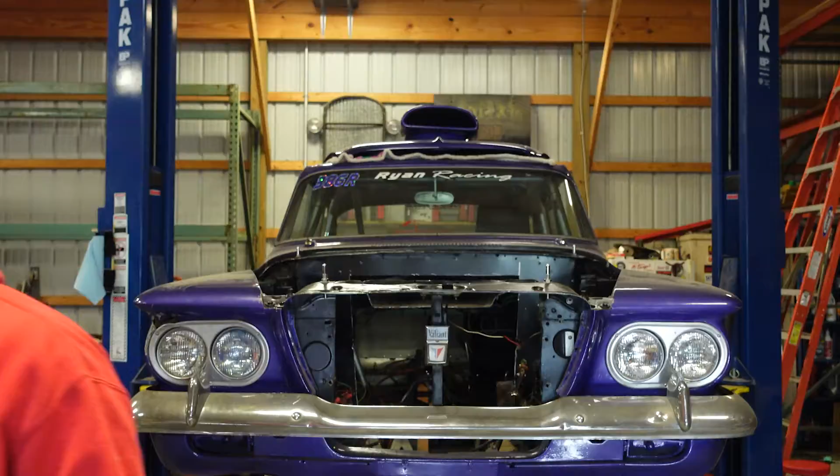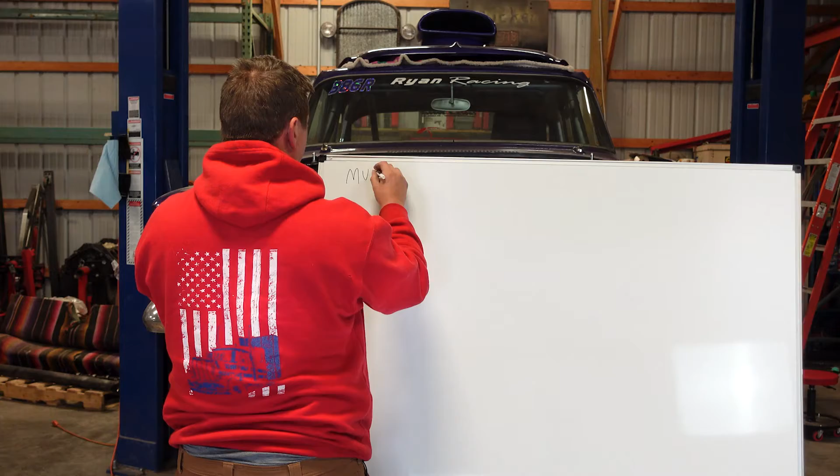I need to figure out a way to be able to talk. Tell you what, I'll be right back. I think this will do. Be right back. Perfect. That'll work. Also got markers. You guys can't see that at all, can you? Be right back. I think I got everything this time.

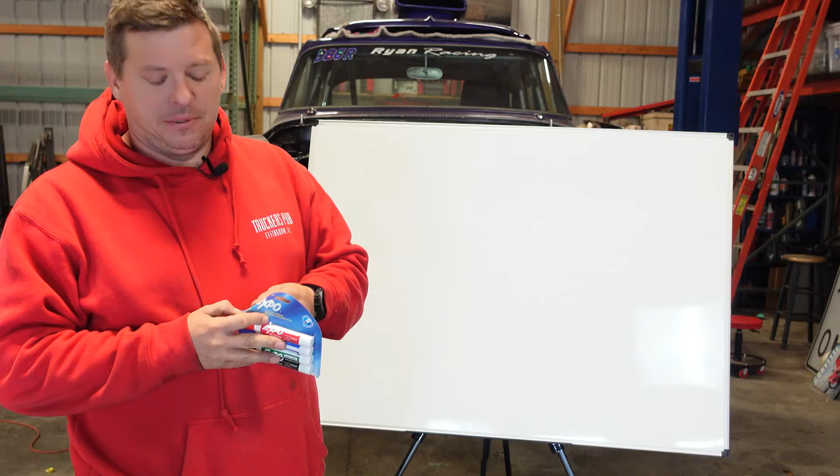All right, let's get started. All right, 6 things that you need to address before you make any cuts when you're upgrading a front suspension.

I don't care if you're changing the style or not, these six things need to be taken into consideration before you start the project because they're gonna dictate how the project goes. The first 3 are super important before you cut anything because you won't know where they were before if you don't measure them prior.

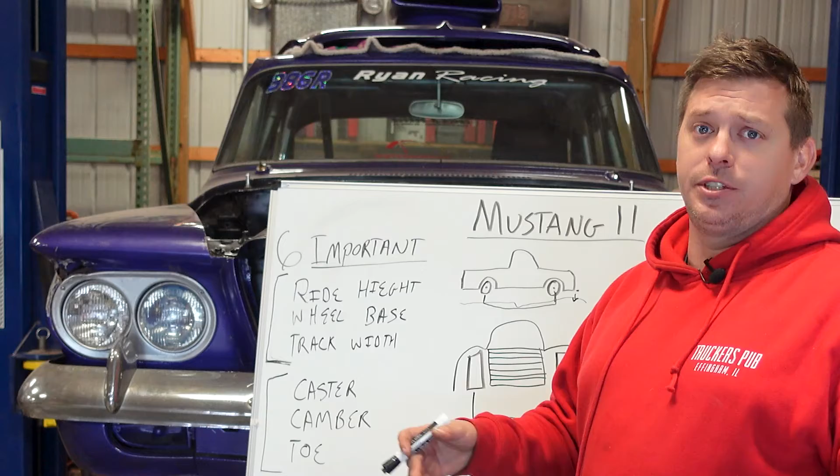You could guess all day, but the best thing to do is before you make a cut, go ahead and get at least these 3 done. The next 3 is something that you can take into consideration as the project progresses, but these 3 are super important. The first one's gonna be your ride height.

And I take that from your frame rail to the ground. So imagine my crude drawings here, this is my truck over there. I would measure from the bottom frame rail to the ground, okay? And let's say that measurement is 6 inches.

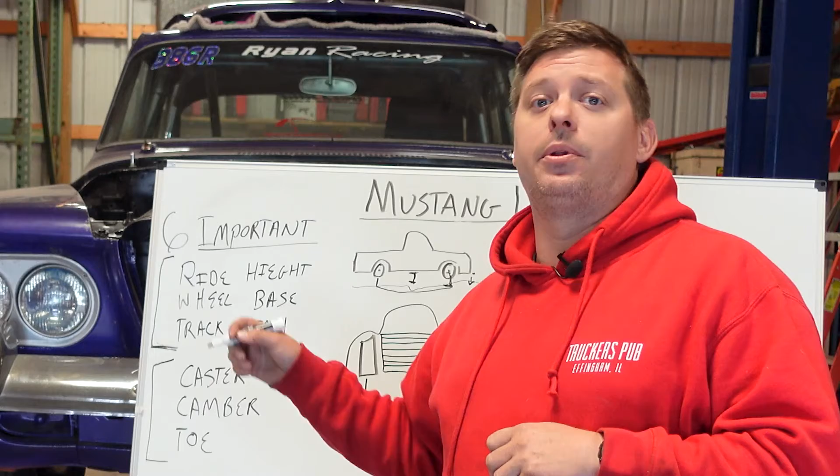I'm sure it's a lot less than that, I think mine's 3 inches, but let's say it's 6 inches for safety's sake. Then you also need to take a measurement from the center of the wheel to the ground as well, and you need to write that down. That's generally gonna be the size tire divided by 2, but you need to make a note of that so that you know, because when you start setting your spindle height, you'll know that off your chassis height, all right?

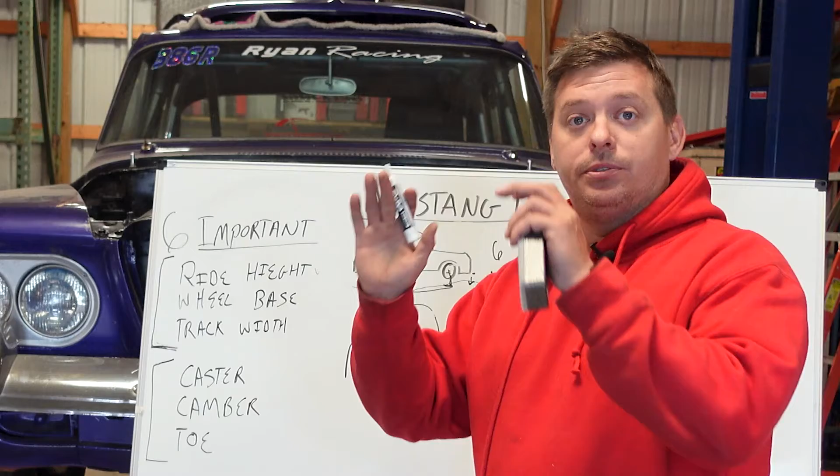The next thing you need to know is your wheelbase. Wheelbase is measured from the center line of your rear axle to the center line of your front spindle. So that's gonna be that measurement. The truck, I believe, is 119 or something inches. That's gonna be super important to make sure that you get the wheel centered in the wheel arch, okay?

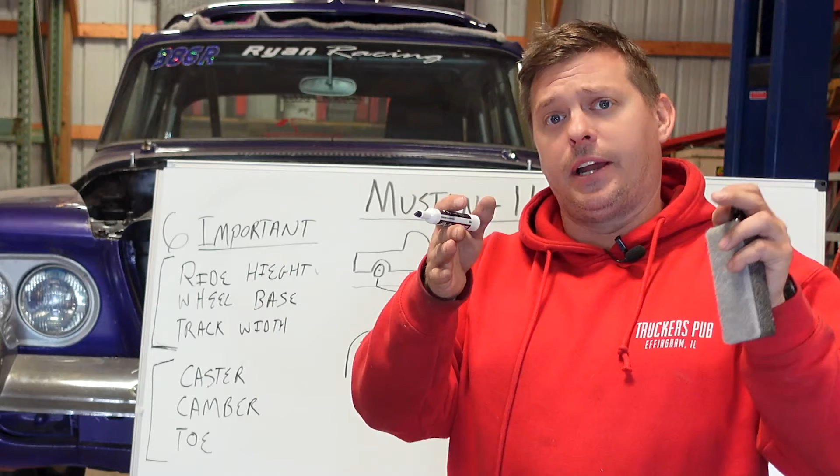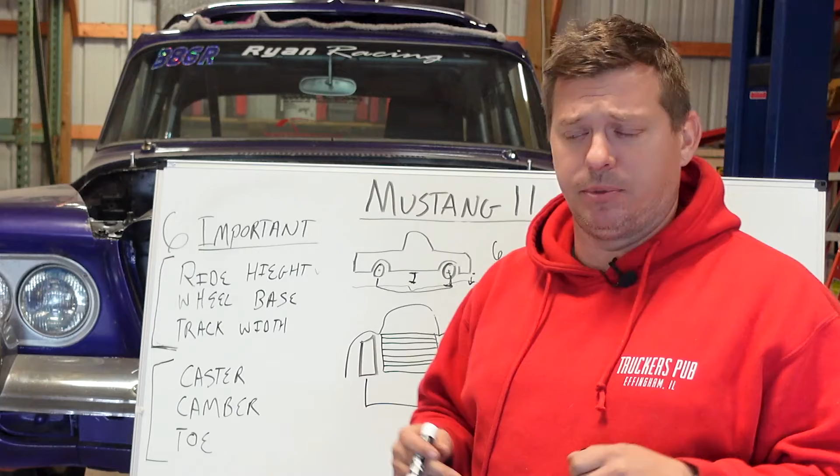Or at least how it was when it came into the shop. Unless you plan on doing something weird for drag racing, sometimes we stagger the front end, then you need to take that into consideration in the future. But still, let's just say simple basics, you need to measure the original, because a lot of the setback rules, it has to be within 2 inches or something. So take that into consideration, make sure you measure it now.

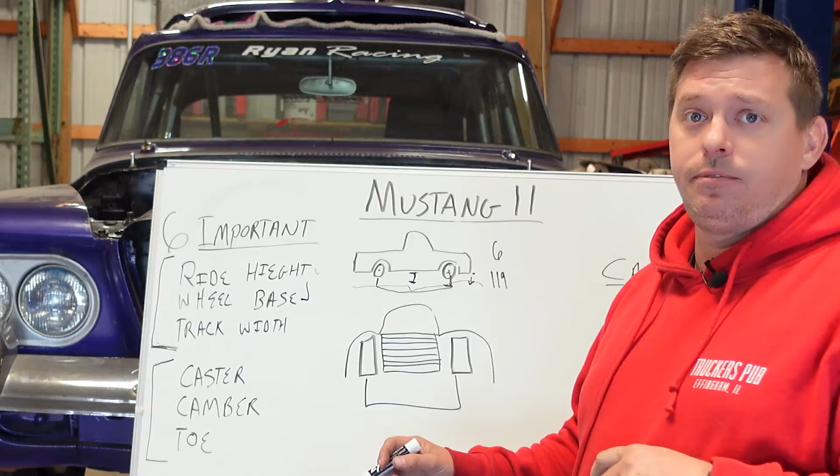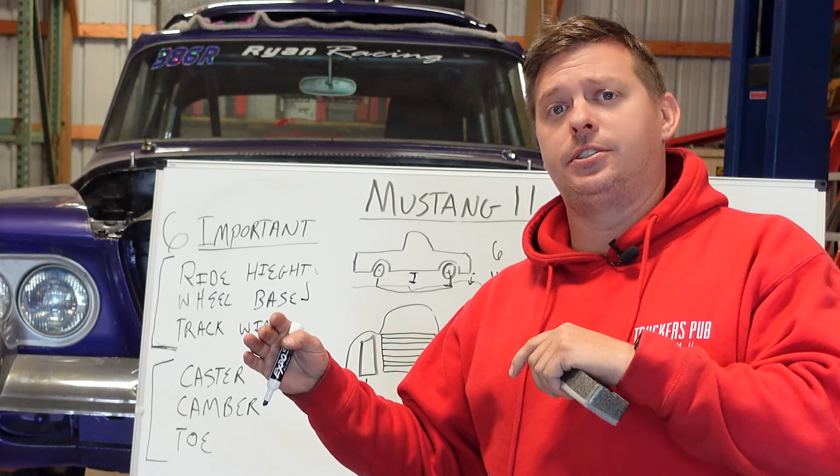The last thing that is very, very important is your track width. I measure that with the tires off, to the outside edge of the rotors. That'll give me where the tire mounts. The reason I do that is if we were taking consideration for a different wheel type with a different offset, we can do the measurements from that to get your track width.

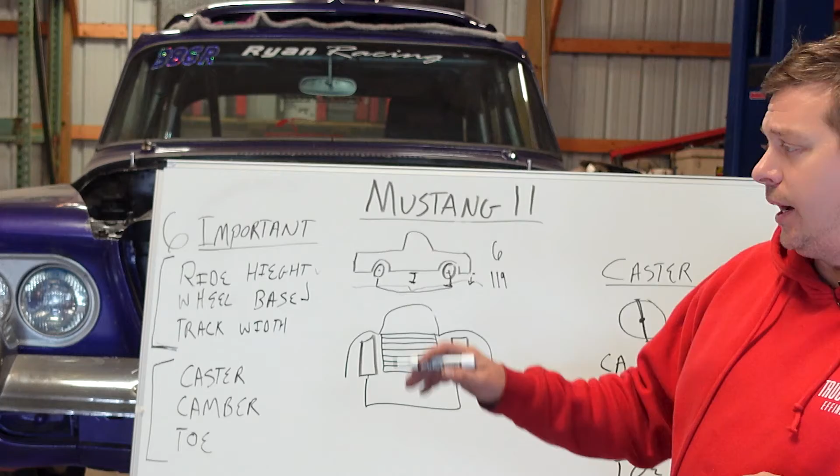So imagine this is the front of the truck, that's the grille, that's transparent tires in the front. You're measuring from rotor face to rotor face, from the outside edge to outside edge. I do not know the measurement on my truck, but I did narrow it. The front end, I did narrow it by a couple inches to get the tires to set up in the fender and still get turning radius.

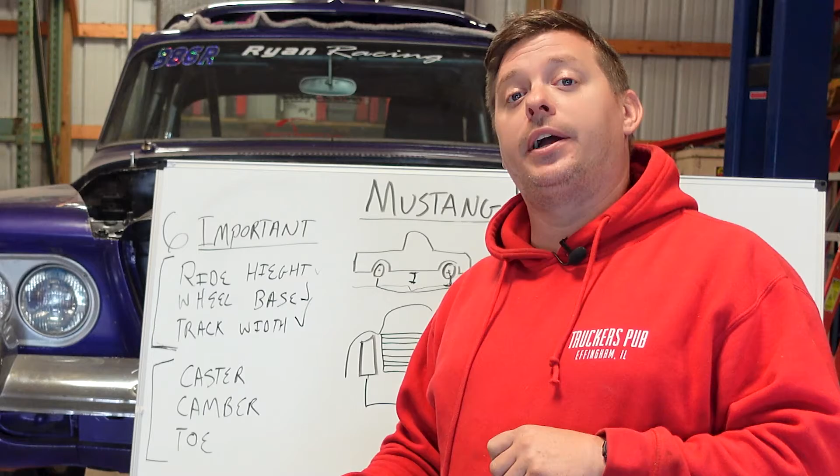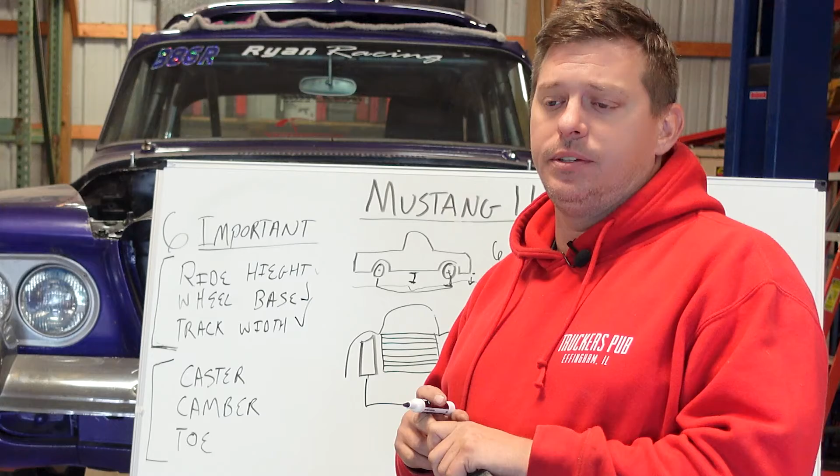So those 3 things are what's really important before you do any cutting. The next 3 things you just need to think about. You could take measurements off the original if you're trying to go back to an original style. Most of the time, these guys watching this are going to be upgrading to probably a Mustang II, or maybe even Dodge Dakota has a front end. It's very similar, it has more adjustability.

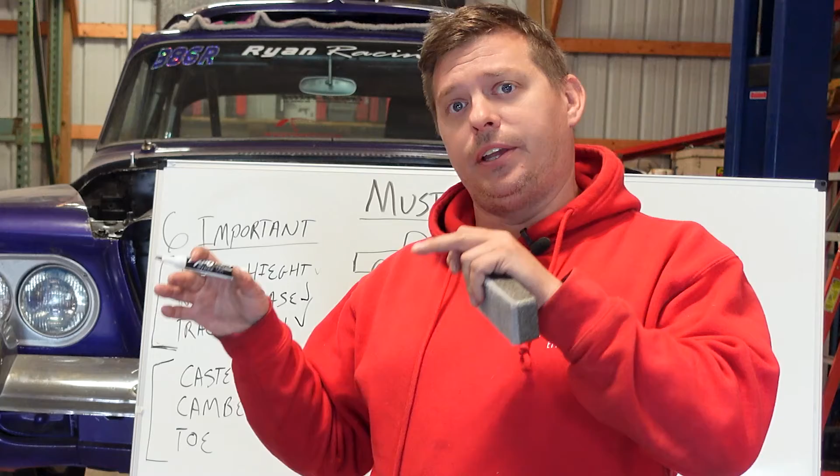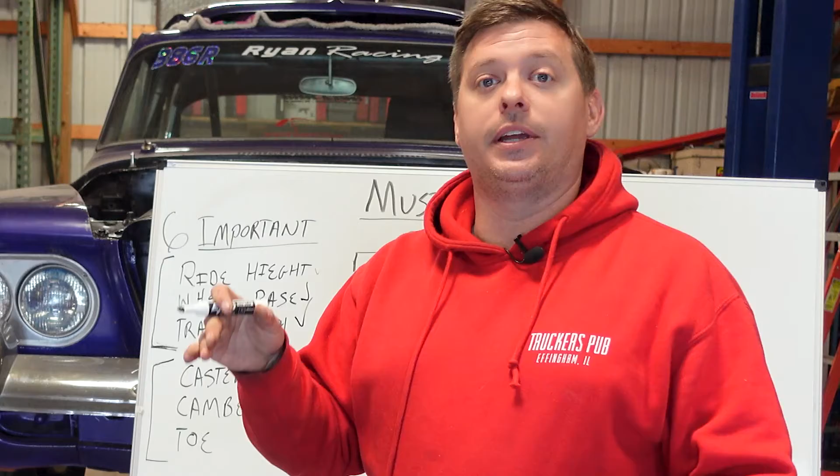But you need to consider these 3 things, because as you make these parts that you're gonna have to mount to the chassis, you need to make sure that whatever you decide on caster, camber, and toe, you need to be able to work that into your project and not run out of adjustment, because all these things need to be adjustable to get alignment, to be able to go straight down the track or around. So these are the 3 things I have to think about.

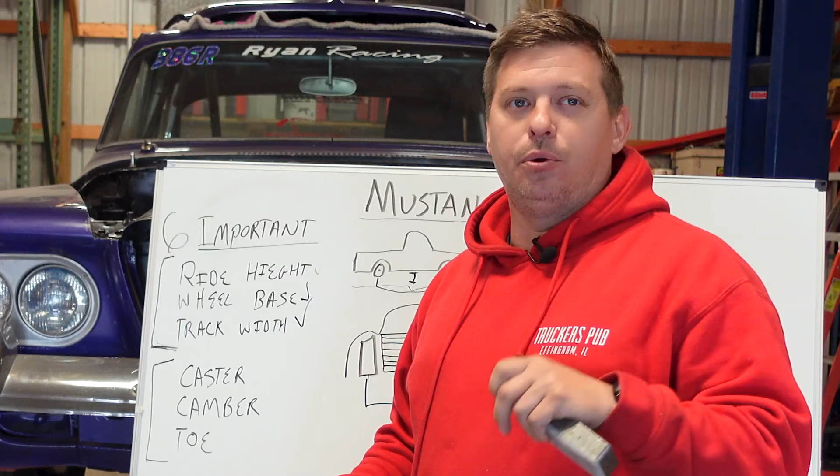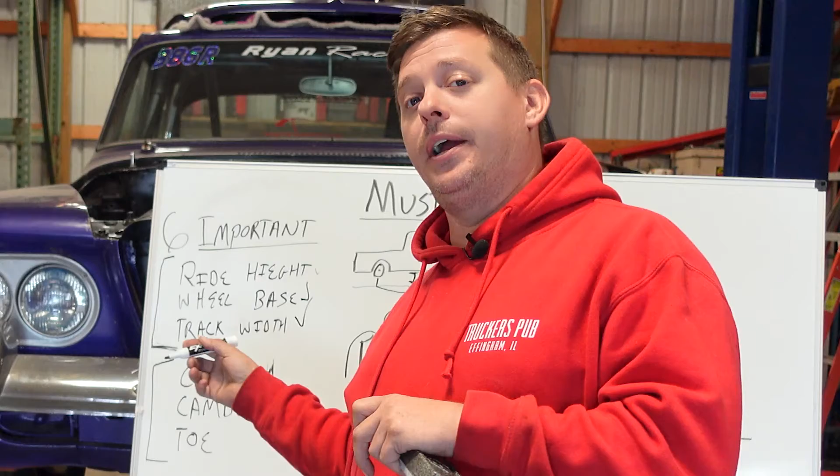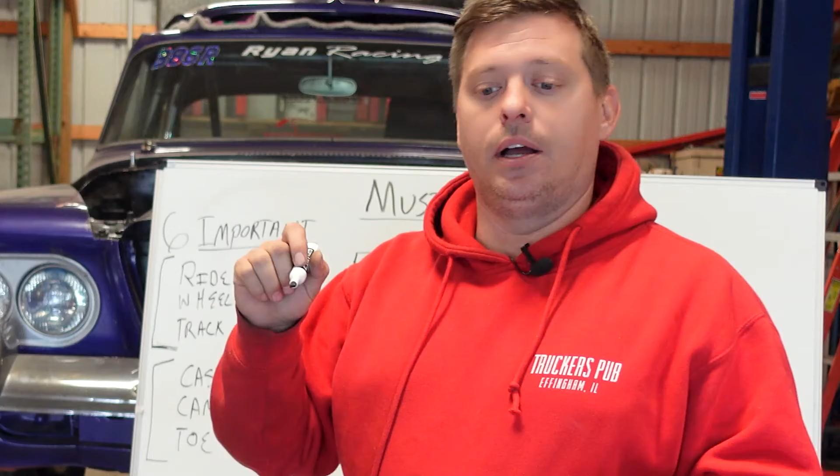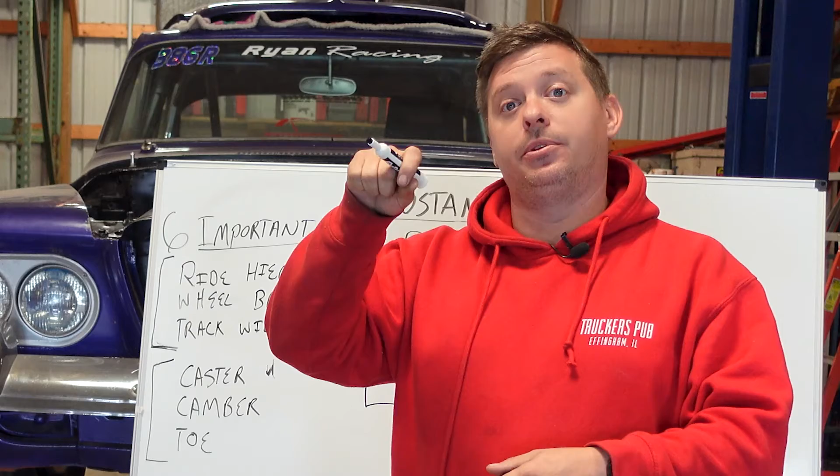On the caster, if you're going to go on the road, or maybe a roundy round or figure 8 car, you're looking for about 4 degrees of caster, and that's using positive caster, so it's gonna be leaned back. I'll show that over here. On a drag car, you can get away with like 6 to 8 degrees. That's gonna keep the car wanting to go straight. And since drag racers wanna go straight, it's good to make it a little more wanting to keep the wheel centered. The one trade-off to that though, is the higher the degrees of your caster, the harder it's gonna be to turn, either at speed or going slow, because it's gonna want to whip back. So take that into consideration.

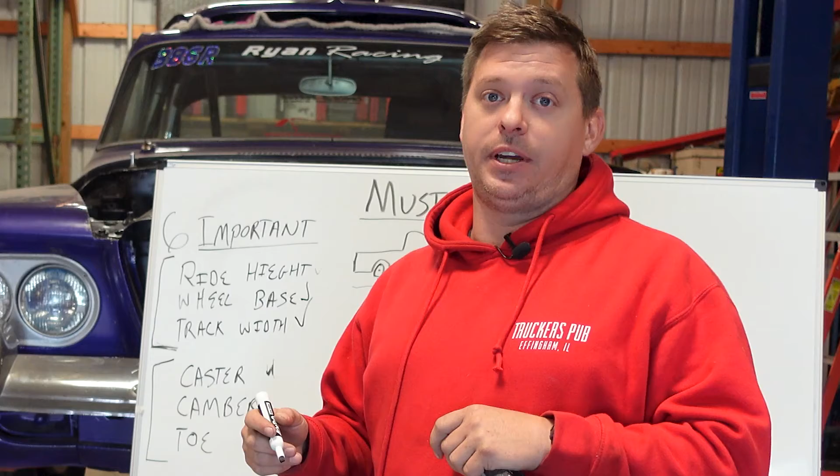What you don't wanna do is have 0 degrees caster. It would be extremely unhandleable. It would try to wander all over the road. So you need at least 2 to 4 degrees minimum of caster. I'll explain what caster is over here.

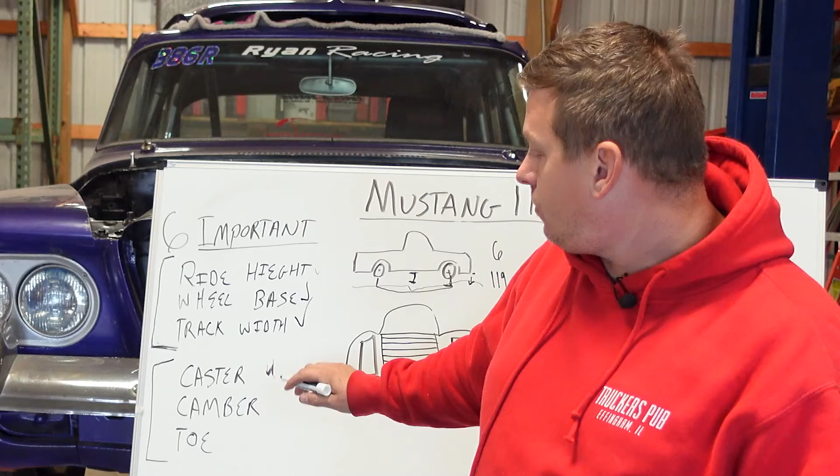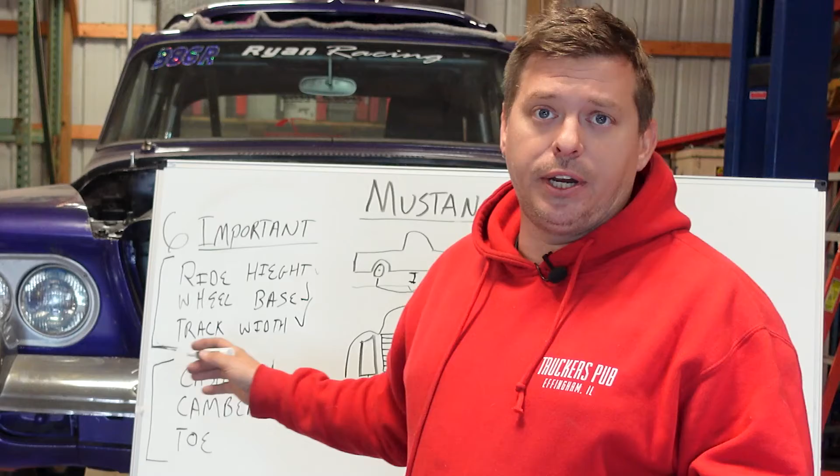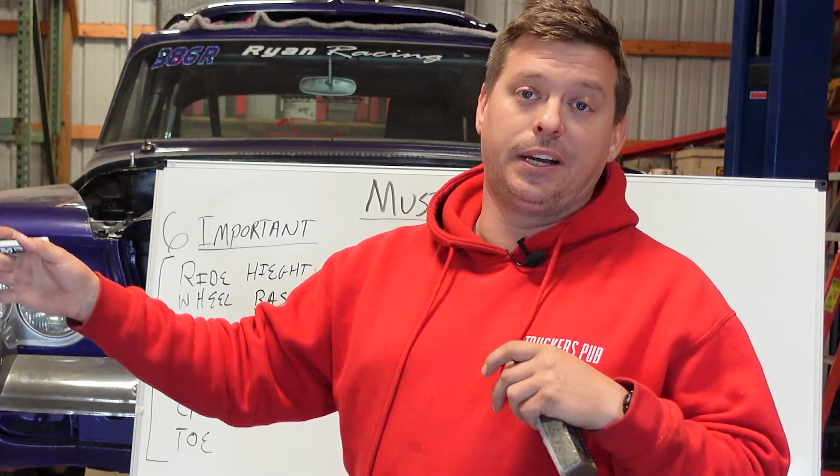Camber is, if you look at cars that have been lowered a lot, you'll see the front tires kind of bend in like this, or like that, depending on how the suspension's made. That is your camber. I'll explain that over here as well. On drag cars, it's 0 degrees - you want straight up and down. Roundy round cars sometimes will have some positive or negative camber depending on what direction they're turning on one side. So again, you need to make that application specific.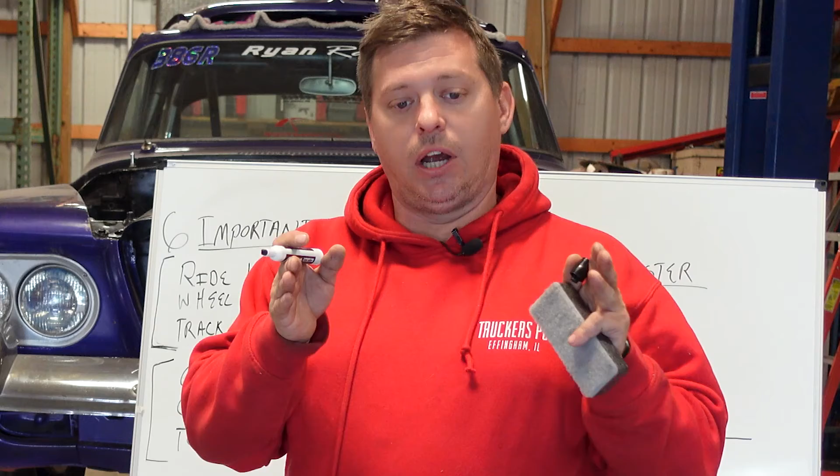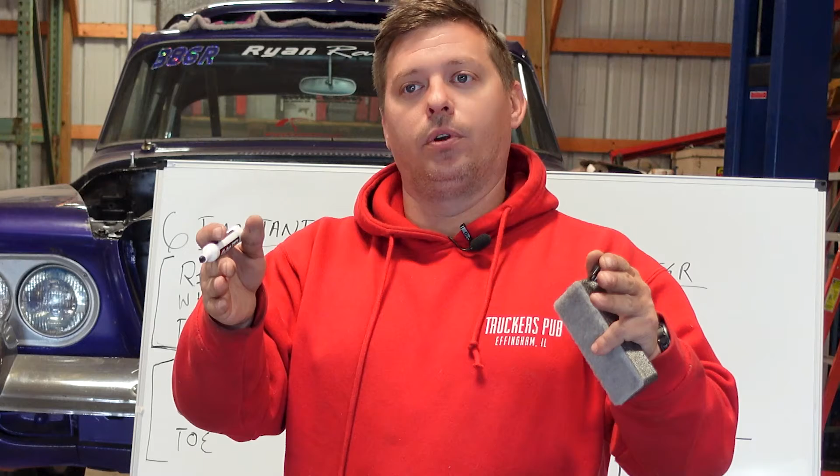The last thing is toe. That's the front wheels - I'll explain it over here - driving forward, most cars and most applications that I know of, you want a little bit of toe in, about 3/16 of an inch toe in. As you're going down the track or at speed, the tires are going to want to pull out, and then you're going completely straight at 0. So 3/16 is kind of a general rule of thumb.

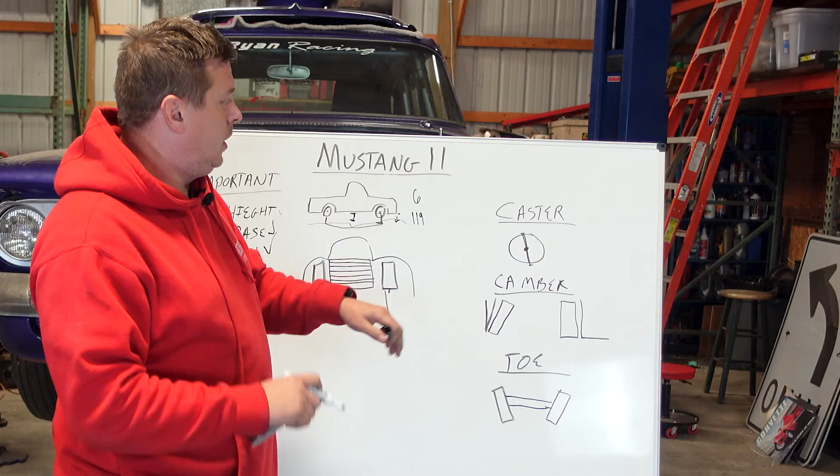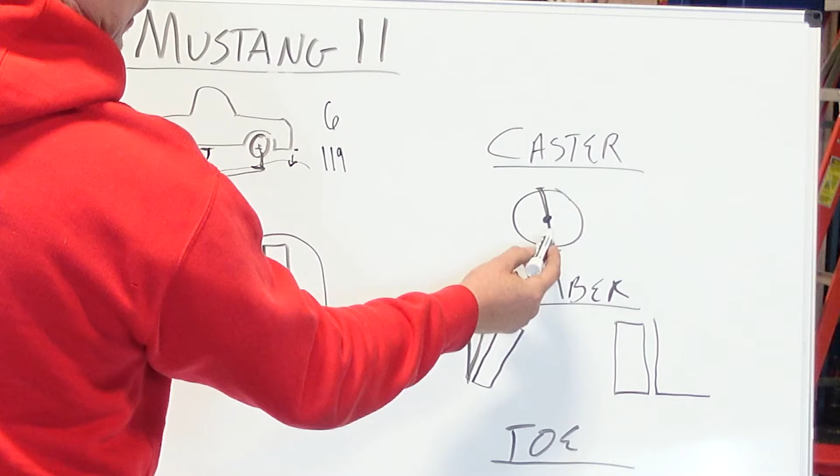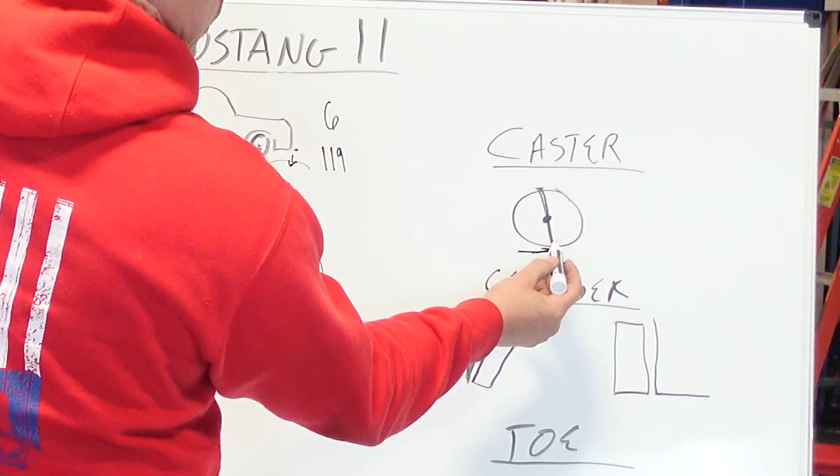So let's go over here and talk about what each one of those are real quick. The first is caster. This is going to be really hard to imagine, and I'll probably have to put a picture up so you can see it. But imagine that this is your tire, and this line right here is the actual axis the tire sits on, or your spindle sits on. I use positive degrees of caster - positive degree is when it's leaned back. This angle right here from 90 is your caster. How far the spindle is leaning backwards will dictate the handling, kind of like a shopping cart wheel.

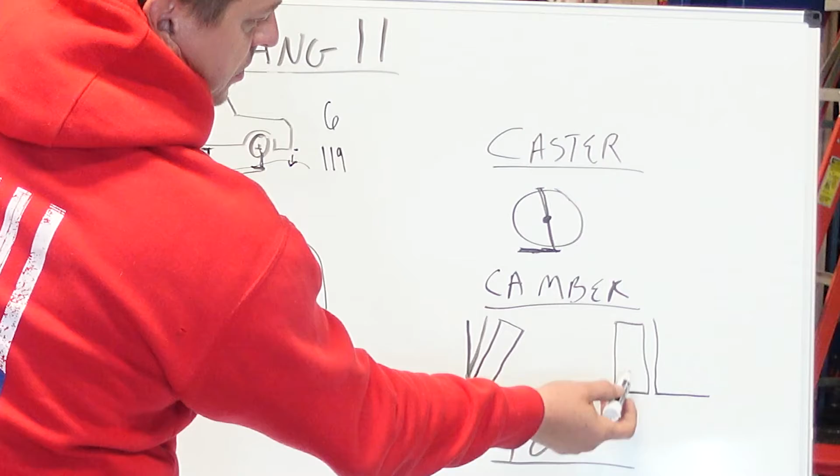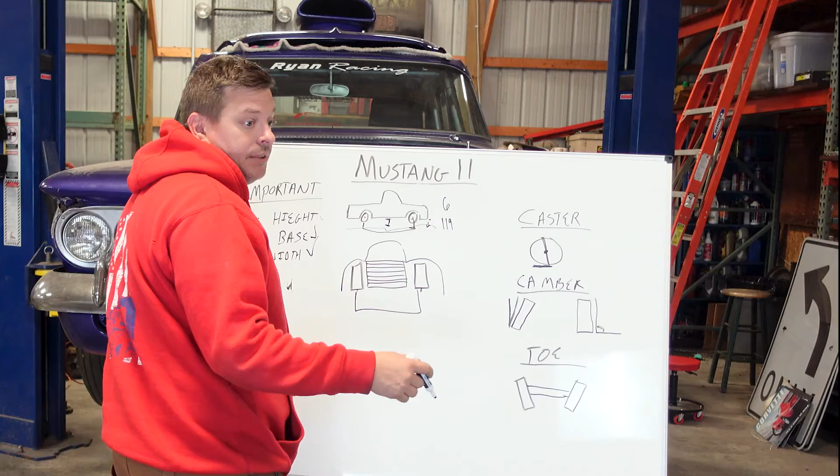The next one is camber, and again, imagine these being wheels. This is cambered negatively, so the tire is inboard, and this one's a 0-degree camber - so that's 90 degrees, the tire's straight up and down. As a drag racer, this is what we're looking for. As a roundy round car, you may have that much camber - you may have 10 degrees, 20 degrees of camber, to be able to get around the corner faster.

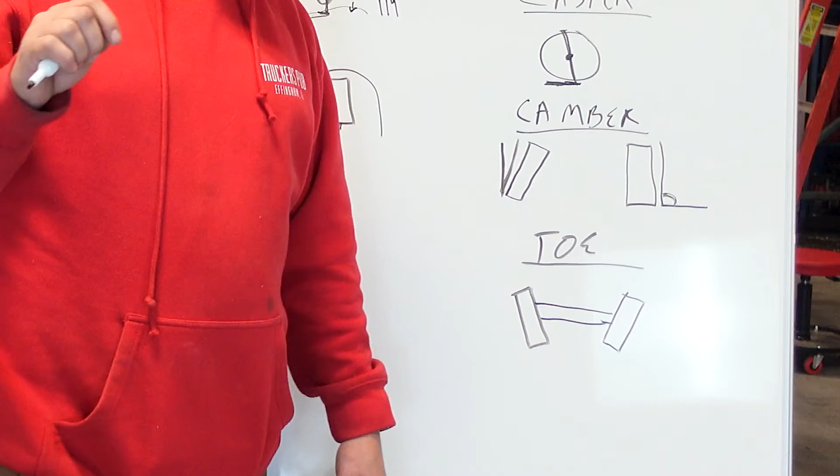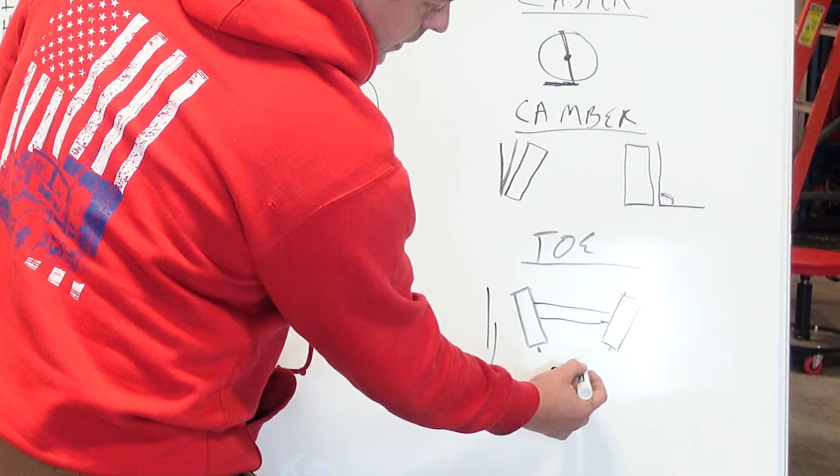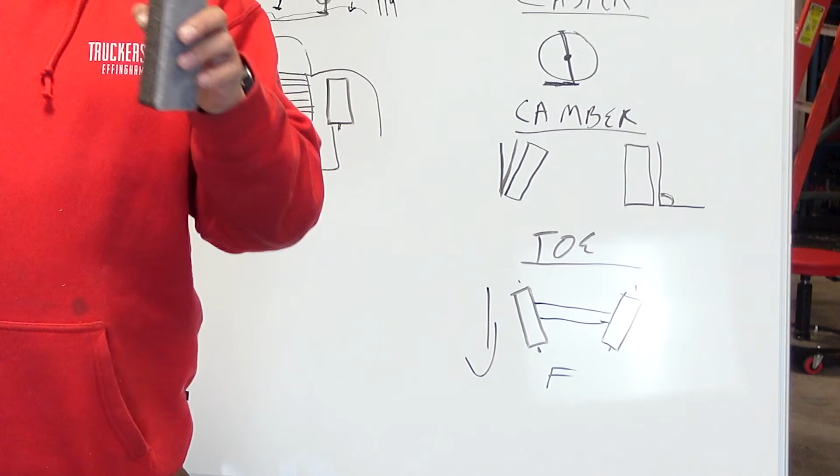The last thing is toe, and that's set up with the actual steering device, whether it's a rack and pinion or a drag link or anything like that - that's how you're going to set your toe. This is very exaggerated toe, but this is the front going this way, and we want toe in. So the measurement from the center of the tire to the center of the tire, we want it to be roughly 3/16 inch. You measure the front, measure the back, and that's gonna give you your toe. Again, you want a little bit of toe in to keep it going straight when it pulls out. So these are the things that you have to decide on or think about, or at least mark down before we get started.

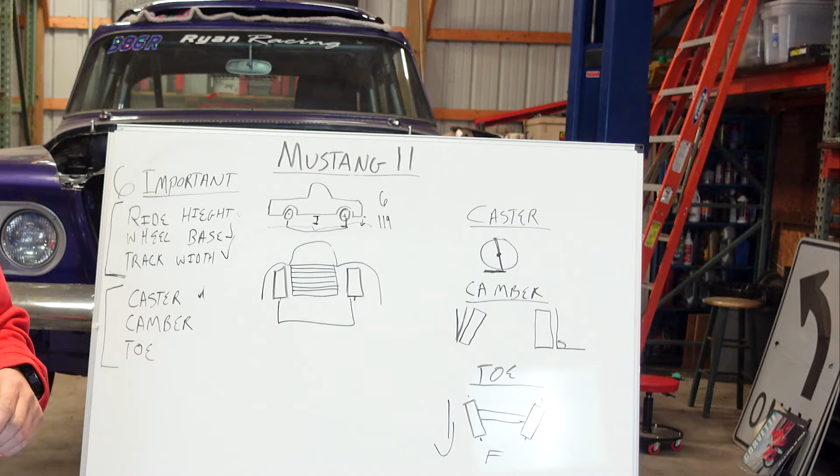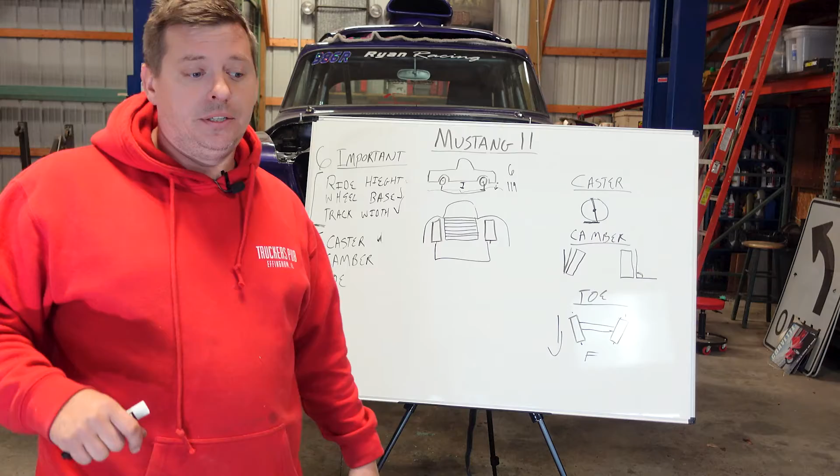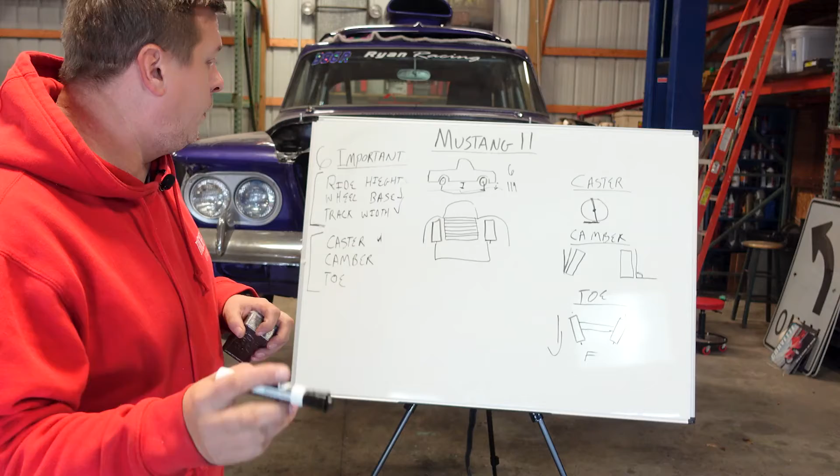So we're gonna actually start looking at these three here. Before I can do that, I'm gonna have to take the front coilovers off so that I can get it down to ride height. There's no motor in this, so I'm gonna have to guess where the ride height was. One thing with the suspension - the Mustang II suspension - you have an upper and lower control arm. So that's a ball joint. There's your spindle.

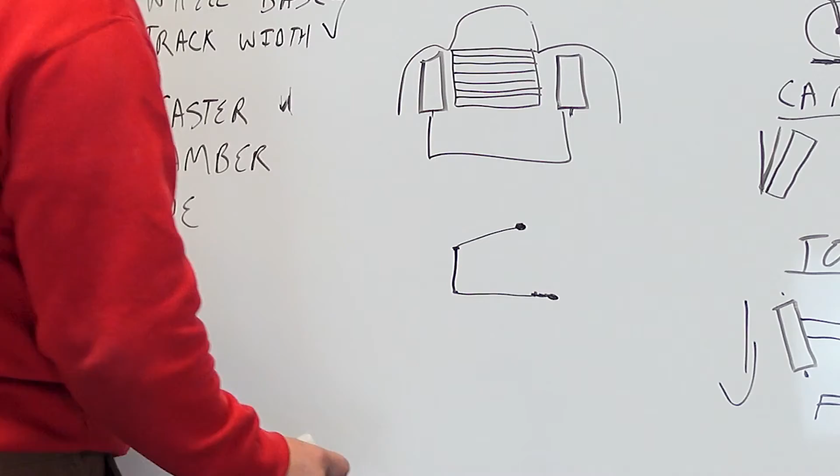All right, actually this is the wrong way. Let's do it the right way so we don't screw this up for you guys.

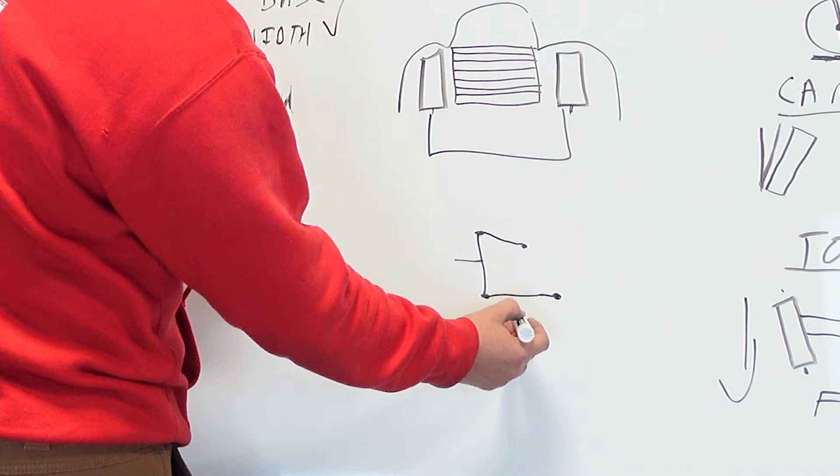Imagine this is your spindle and ball joint. Your upper control arm mount is going down approximately 20 to 30 degrees, and you want your lower control arm to be parallel with the ground, so you want this at 0 degrees. That's how I set them up, and I've had good success with this.

The reason you want this one to be downward is as you make a turn and the suspension gets loaded on one side, it's actually going to cause the tire to camber in, which gives you more traction on the ground. Also, almost all Mustang 2s are not parallel, or not equal length, so your top's always gonna be shorter than your bottom.

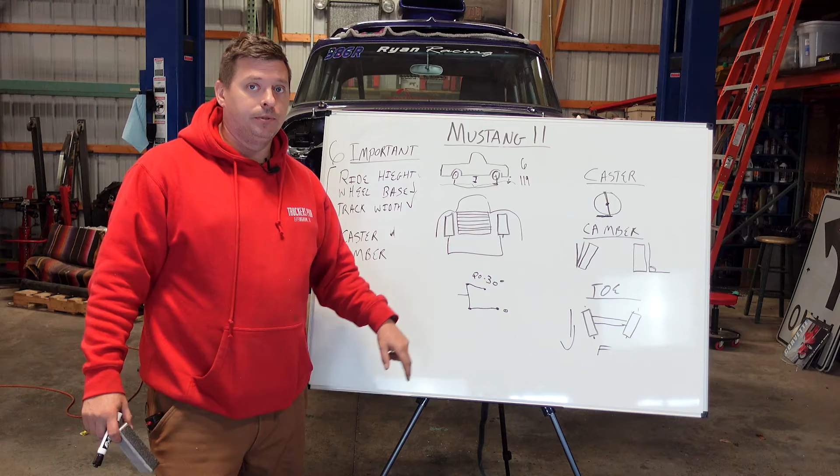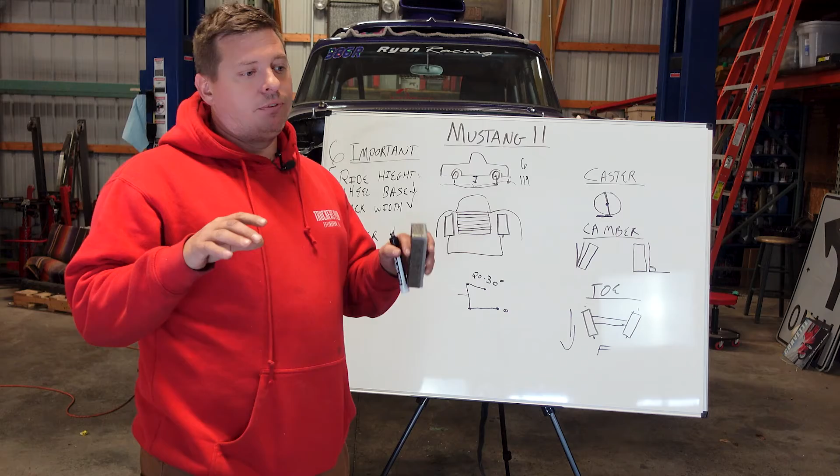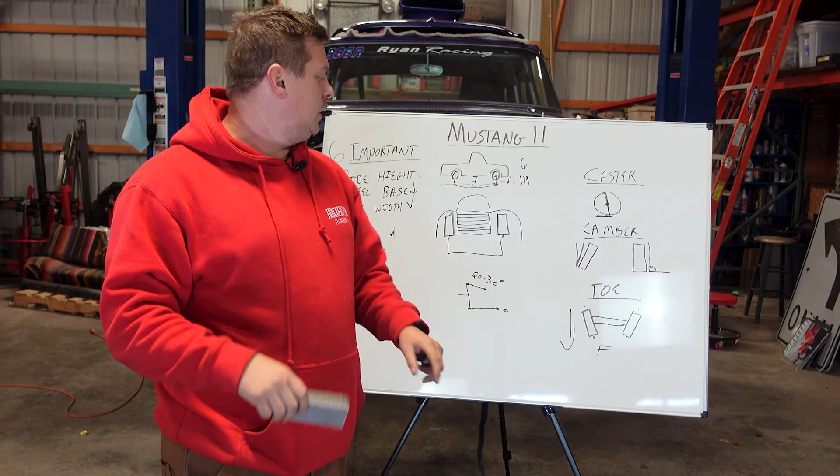Those type of things we'll get involved with more when we actually set up the suspension or get the design made. I'm half and half on whether I'm gonna do round bar and get everything mounted to the round bar, or just use the CNC plasma to cut out some Mustang 2 style suspension and tie it all together from the steering rack mount. We'll have to decide that when we get there.

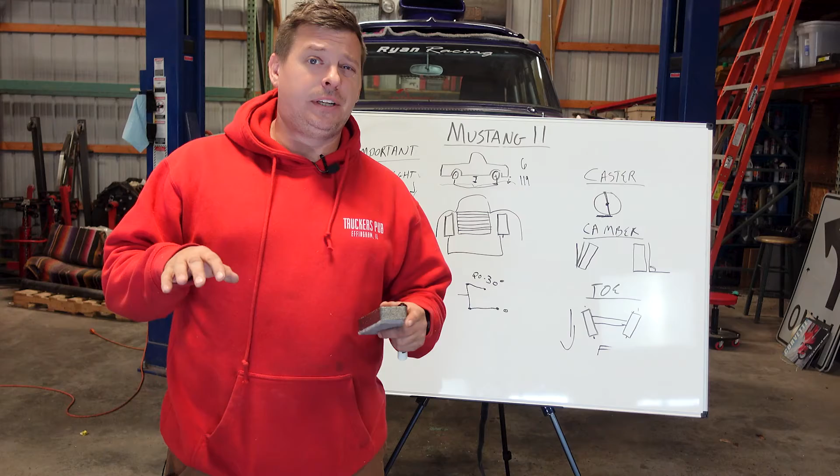I'm fairly certain I'm gonna lean towards using the plasma table. I think it's gonna give a cleaner look, and it's gonna be lighter than trying to add a bunch of tubes to make everything hold. So this is what we're looking for, and these things we're gonna measure right now and start getting things cut apart.

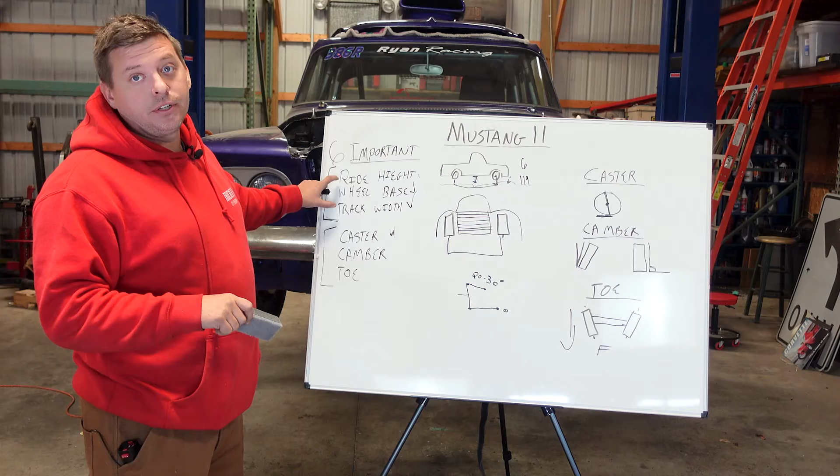All right, I just got the car lowered down, got the coilovers off so we can get it down to ride height, since there's not enough weight in the front to push it down. I confirmed it was ride height with the owner, and now I am going to show you where I took the measurements from, what I measured, and one other extra thing I measured just to check if we're gonna be improving Dalton's situation - and we definitely are. Let me show you what we got.

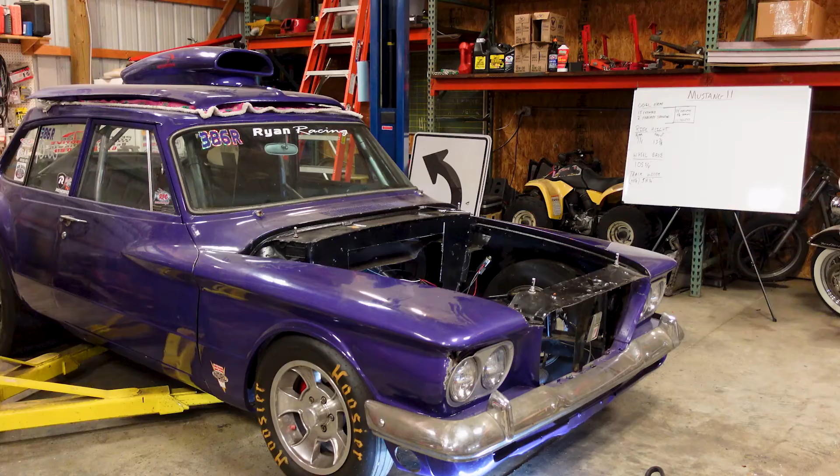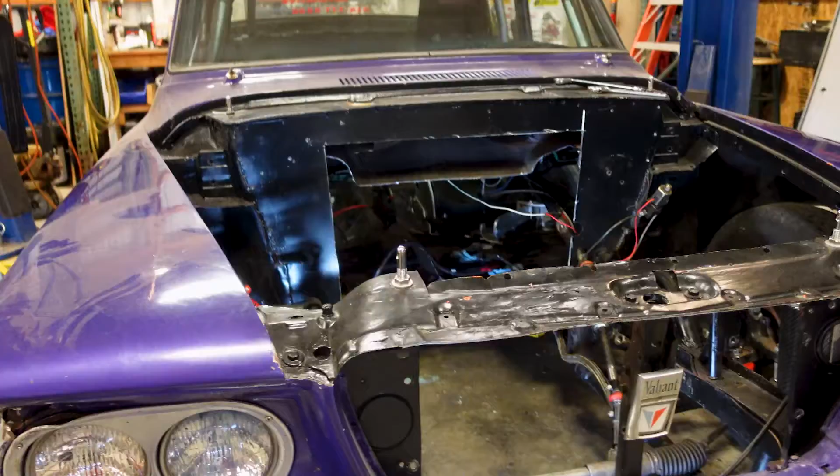All right, as you can see, we're down at ride height on the ground. We took the coilovers off, they're over there, and I'll explain what and why I did some measuring on those. But first things first, I wanted to confirm that the original install had it right.

If you can see that lower control arm right there, you see how it's roughly parallel to the ground? That's where I first lowered it to and checked the ride height, and again the owner confirmed that was the right ride height. So the guys that originally installed this did have that parallel like it was supposed to - good on them. Next, we'll talk about where I measured from.

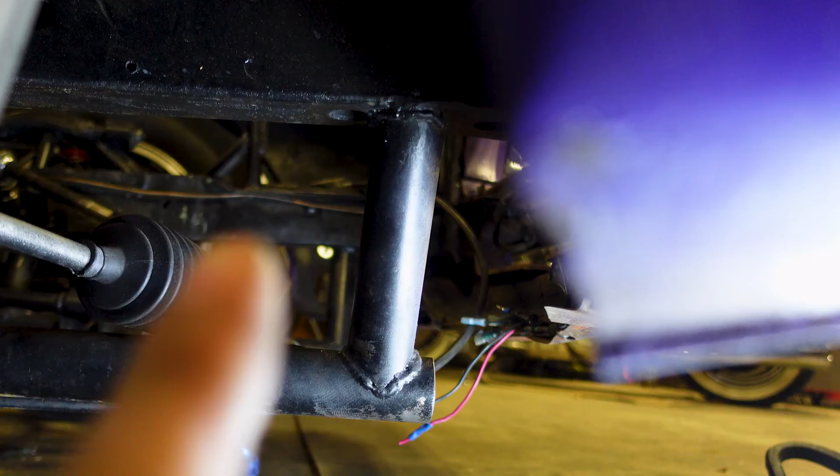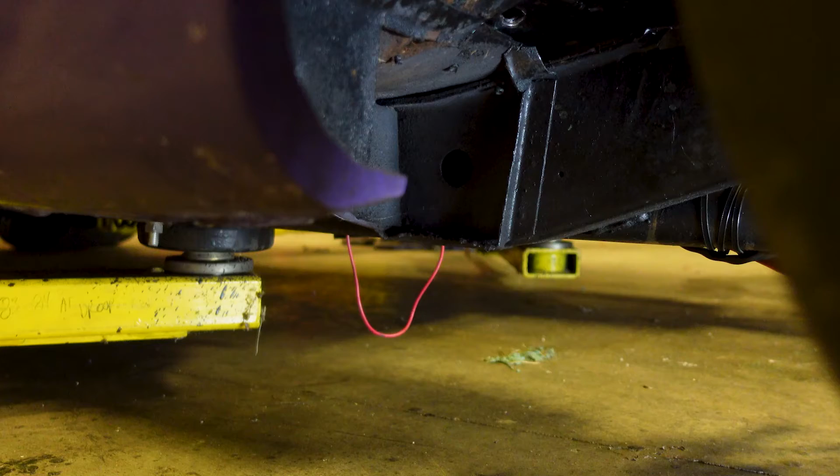See that frame rail right up there? I measured from there down to the ground. And over here, I measured from the back down to the ground. So I have two measurements, from the front of the subframe connector to the rear of the subframe connector.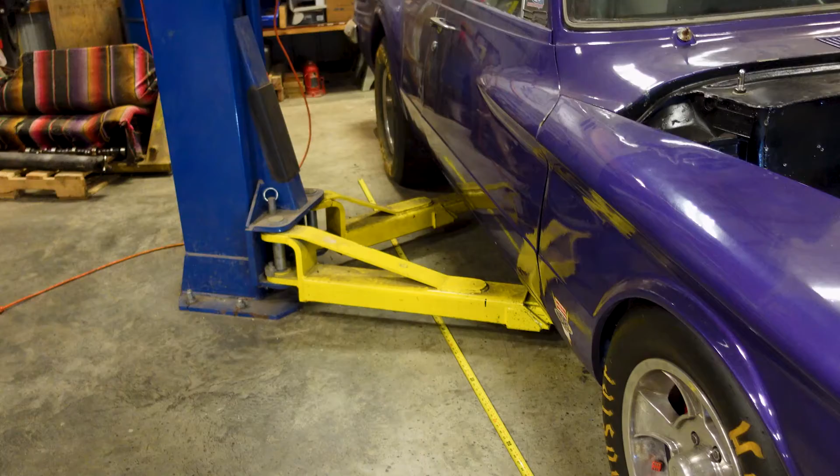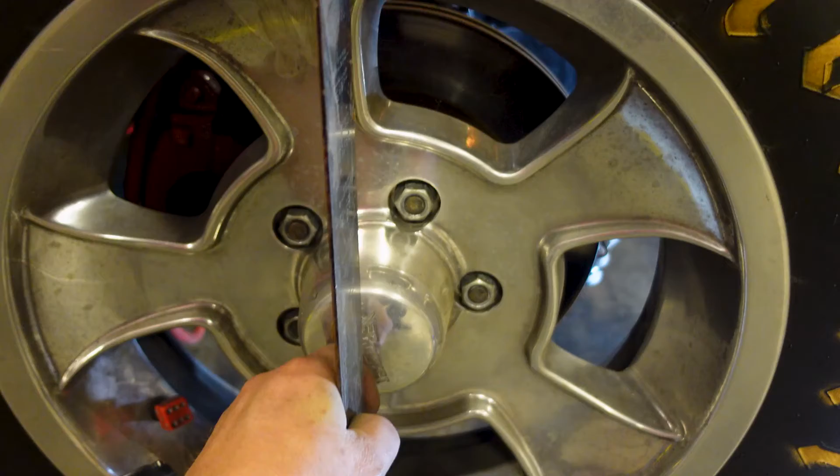Next, we measured the wheelbase by laying a tape measure on the ground. I've already done this in the back to line it up, and then you take a square and square and plumb through the center of the spindle line. If I get it correctly, it is 105 and 3/4.

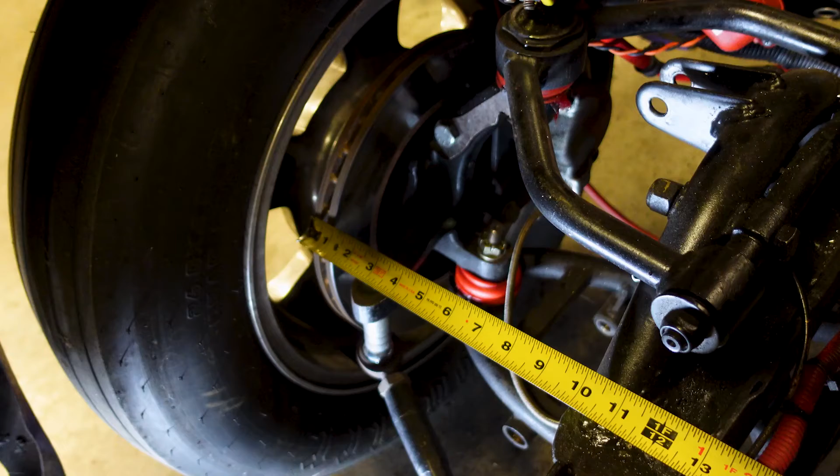All right, this one's gonna take a little doing because I can't do it with just one hand. But on this one, I measured from the rotor face over to...

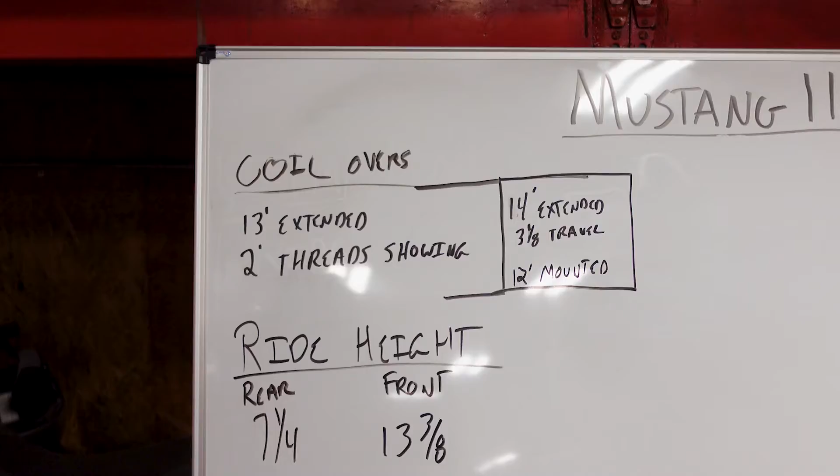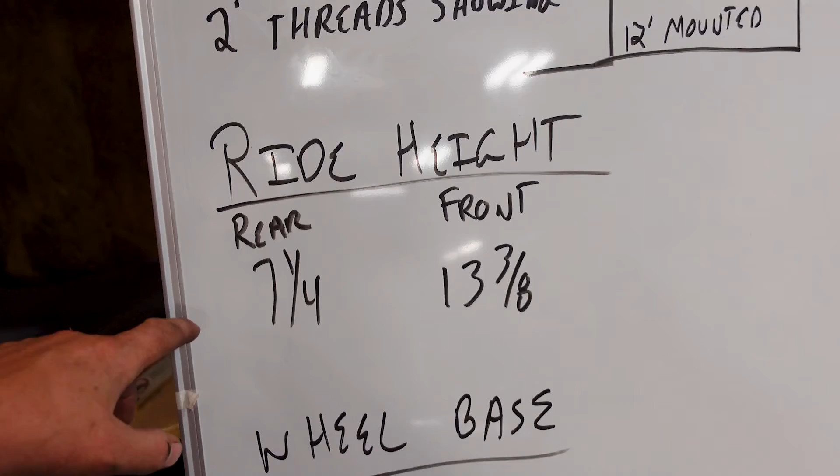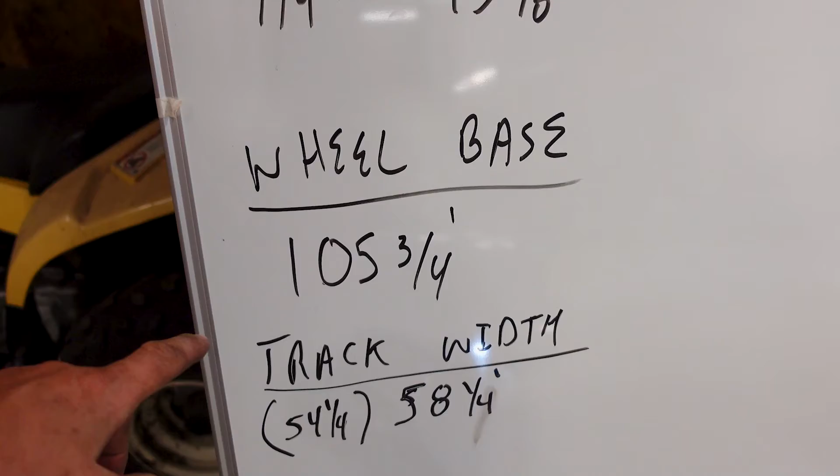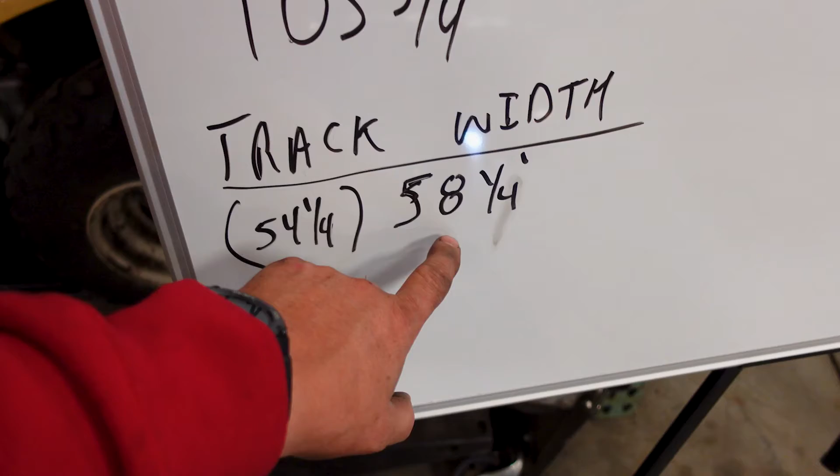All right, so here's the measurements we currently have. These right here I'll talk about in just a second - these are the ones we talked about previously in the video. Our ride height is 7 1/4 at the rear of the subframe and 13 3/8 on the front. The wheelbase of this vehicle is 105 3/4, and the track width we just talked about. This is rotor face to rotor face, and then we have to add the actual hat value, which we'll get to as soon as we get the tires off.

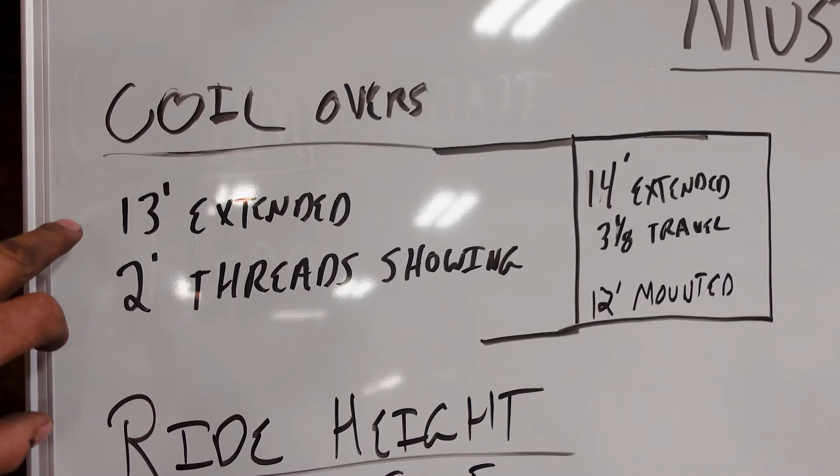Up here, I wanted to confirm what I thought was going on. Before I took the coilovers out, I measured the actual eye-to-eye distance, and it was 13 inches. When I took the coilover out and fully extended it, I actually had 14 inches. So that means he only had 1 inch of travel, basically, because there's only 3 1/8 travel, and he had 1 inch in the shock.

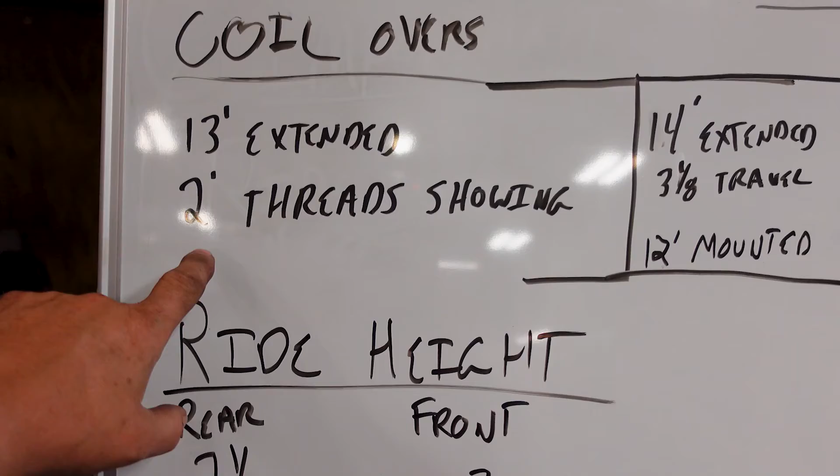Also with that, I measured the threads showing, which was 2 inches. So when I put everything back together, I'll go back to this number on the threads for the adjustment for the coilover, and it should be pretty close to the ride height, because I'm assuming he had this set up prior, for the 2 inches there.

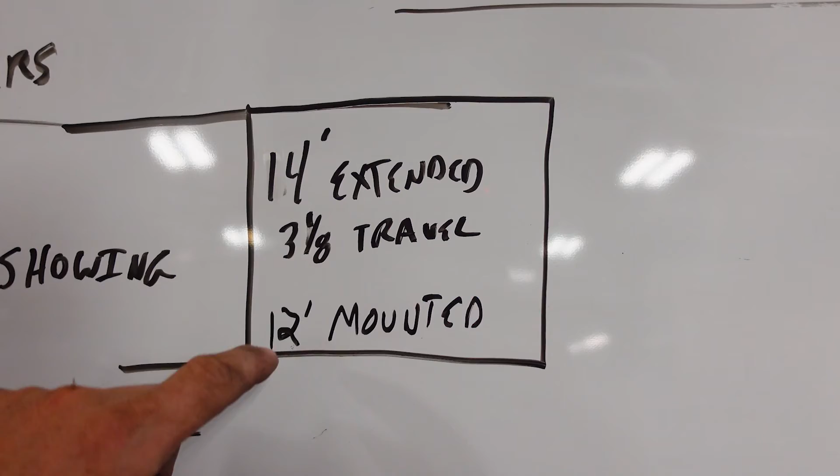What we're gonna do instead is, since I have a shock that can go 14 inches fully extended with 3 1/8 inch travel, I'm gonna go 2 inches in the hole, which gives them 2 inches of travel to expand. So I need to mount it at 12 inches. I'm hoping that makes sense, but you'll see more when we go into the fabrication part.

I'm hoping that has halfway made some sense to you, and you see what I'm going at here. I'll try to explain more of the detailed parts, but just know for now, this is the stuff I'm just kind of finding out.

What we're gonna do the rest of this video is tear off the rest of the front end. Not bare clean, but get all the A-arms off, the wheels and tires, brakes, assembly, all that stuff off, so we can start CAD designing however we're gonna do this, whether it's tube or something made on the CNC machine. Either way, I have to CAD draw it, or at least draw it on cardboard to figure out exactly how we're gonna mount this up. So let's get after it, let's get the rest of this stuff torn apart, and I'll be back in just a sec.

All right, I got everything off the car that's just bolt-on items. I really don't want to cut anything yet, because I'm going to use what's there to guide my process and make it a little easier. Not to say you couldn't start completely fresh, but in my situation I have some kind of guide to go off of.

Now, I do need to move the spindles inboard by 1/2 inch on each side, so 1 inch less track width. We talked to the owner about that - the tires looked like they were going to rub, especially in full compression, so I'm giving him a little extra so he's not rubbing tires when making turns. Other than that, it's going back about the same as it was, just done to a little higher standard.

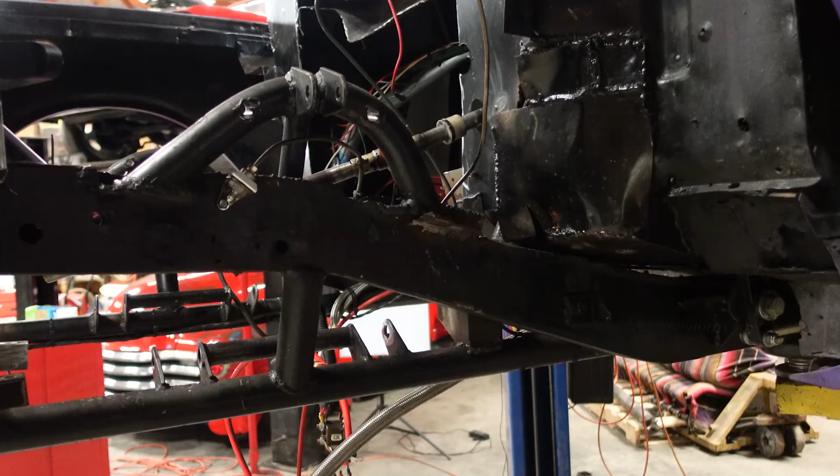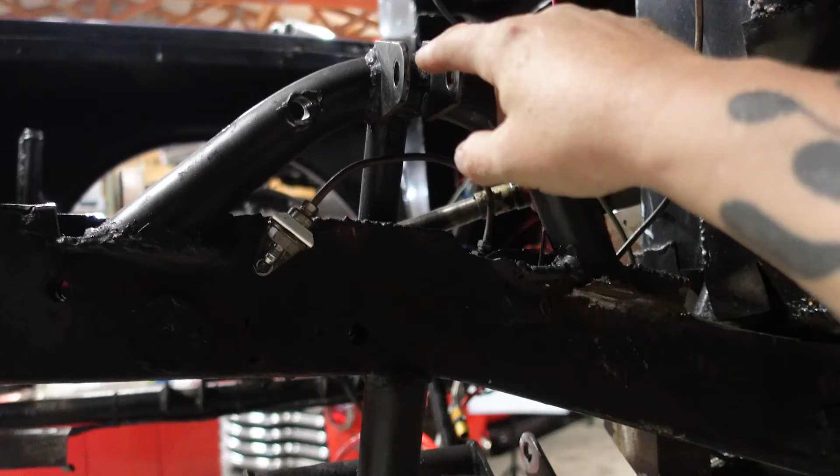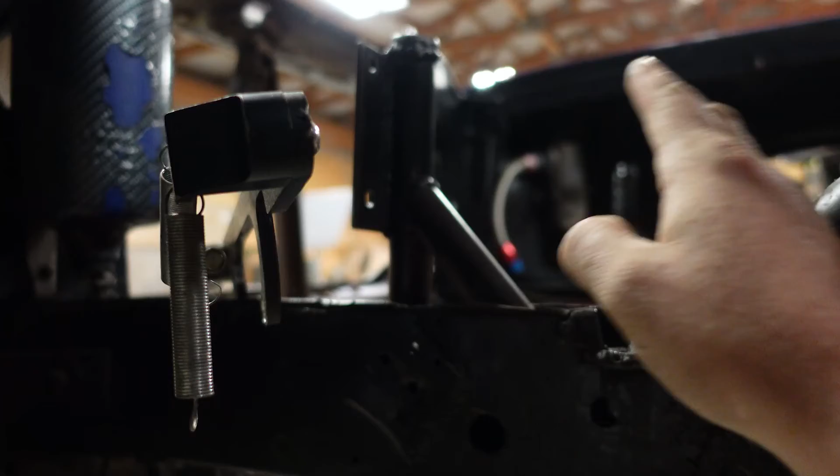So let me show you everything broke down. Here's the driver's side. This is the lower bar that held the lower control arm, and this is the upper bar that held the upper control arm and the coilover. All that's getting cut out and replaced. The only thing left will be the original frame rail. I'm also cutting off the old motor mounts, because we're going to end up mounting in a different spot. And the rack will have to be dealt with too, because I'm getting rid of all this, and this is where the rack was mounted. So we've got a lot of work to do.

Again, I don't want to cut any of that off until I have a better game plan about what I'm doing. It's just going to make it easier on me.